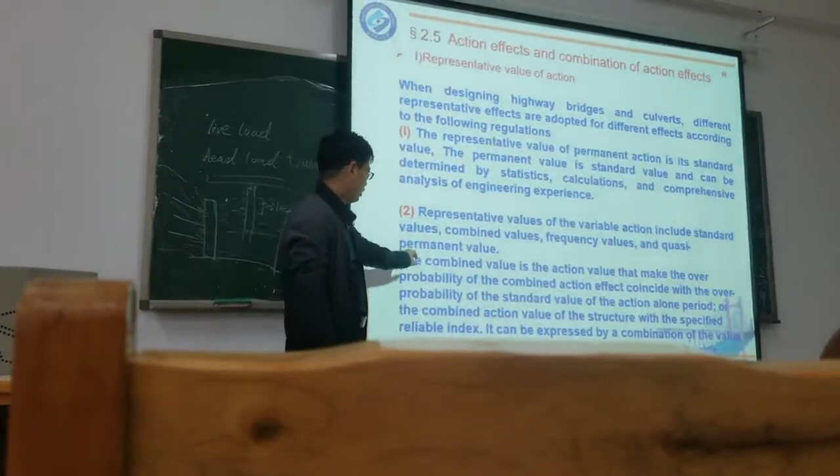The second type is the variable action. The reference value and the representative value can also be obtained by the standard value multiplied by different coefficients, and this coefficient is absolutely smaller than 1 - maybe 0.9 or something like this, considering different situations with different values.

This combined value is making the over-probability of the combined action effect coincide with the over-probability of the standard value. So that means with this action maybe acting on the structure alone, we can get the probability of this action.

For example, take the vehicle - if this bridge is just open for vehicles, with no people working there or anything else, just vehicles, this is a very simple situation, just the vehicle goes through this bridge. But if besides the vehicle we also allow people or animals to go onto this bridge, then we need to consider this as a second variable load or variable action.

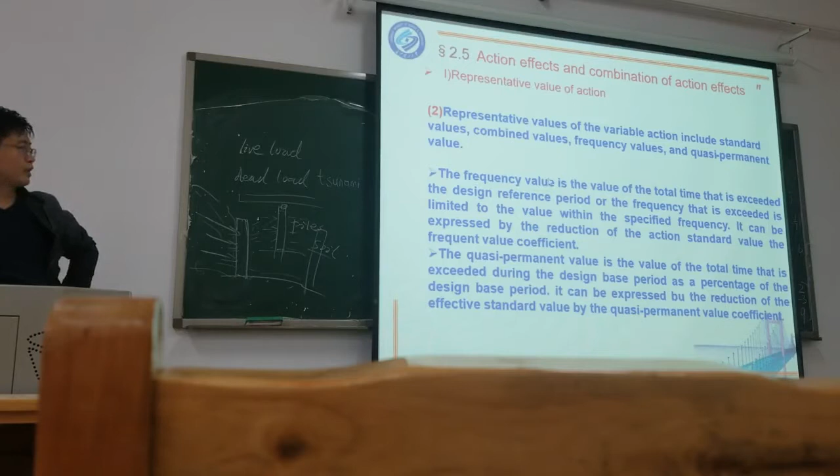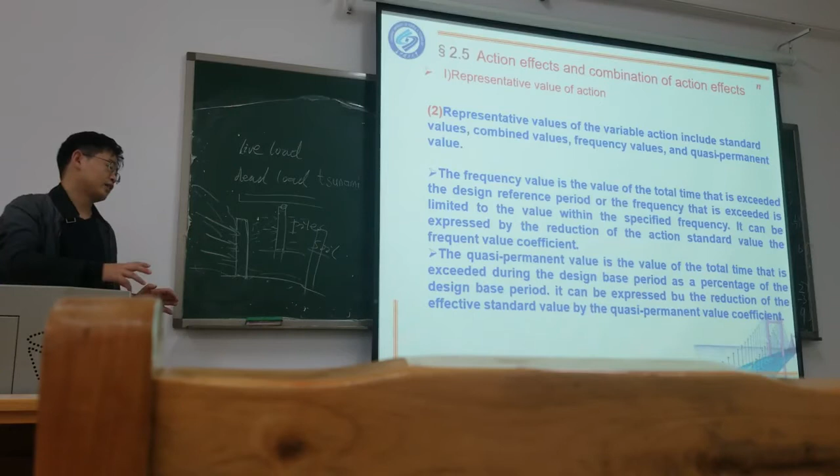So for this frequency value, let's see - when we design, for example, for vehicles, there's lots of different types of vehicle: large, small, heavy, light, lots of different cars. So when we design, the code just gives you a standard car, the weight, the dimension of the car, because you cannot consider every different kind of car. We just make it simple - we use one kind of car to represent all cars.

But this standard car, of course, is not the real situation. If you only use this standard value, you cannot reflect the real situation, because in real life different cars will make up the traffic - trucks, buses, small cars, and so on. At different times, different cars act on the bridge.

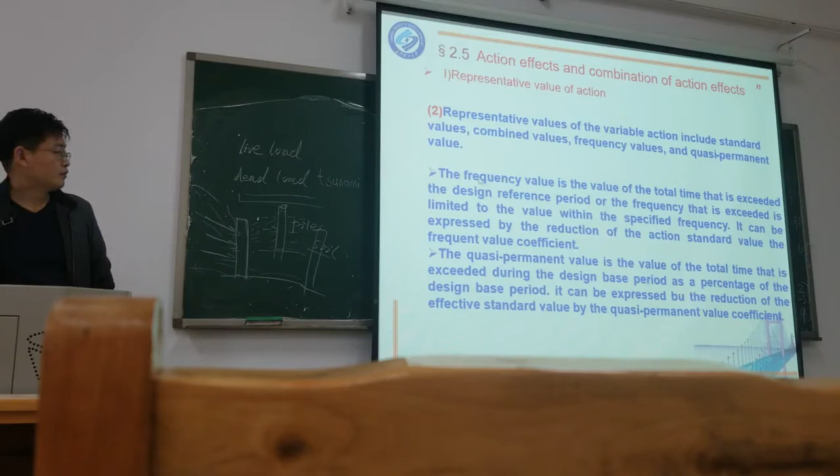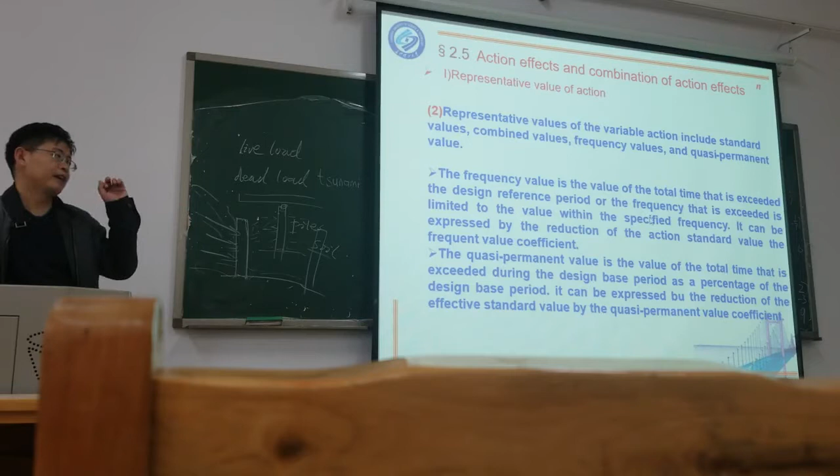So this frequency value is just used to consider, most of the time, the mean effect induced by the vehicle. This value can reflect that - because not every time is the car full on the bridge, or sometimes there's no car on it. Sometimes it's just one car, sometimes maybe 10 or even many cars. So you need to think.

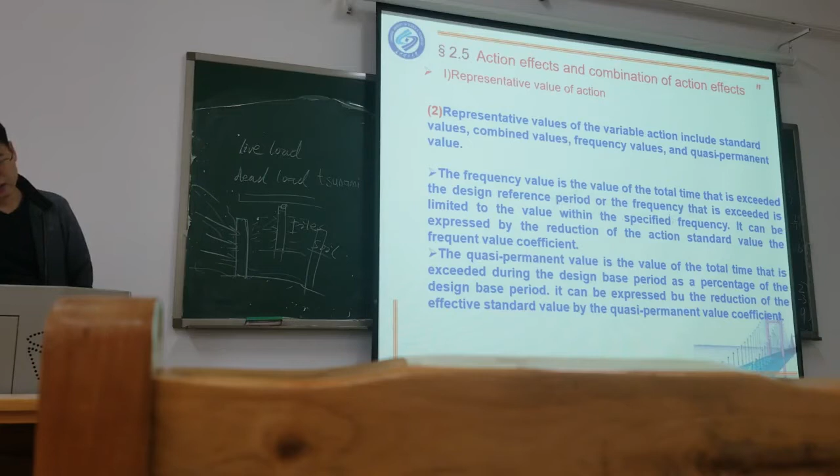It's a statistical probability question. There's no fixed value. So that value is just to consider the mean situation, the mean probability. Or as this sentence says: it is the value of the total time that they exceed the design reference period, or the frequency that they exceed is limited to the value within the specified frequency.

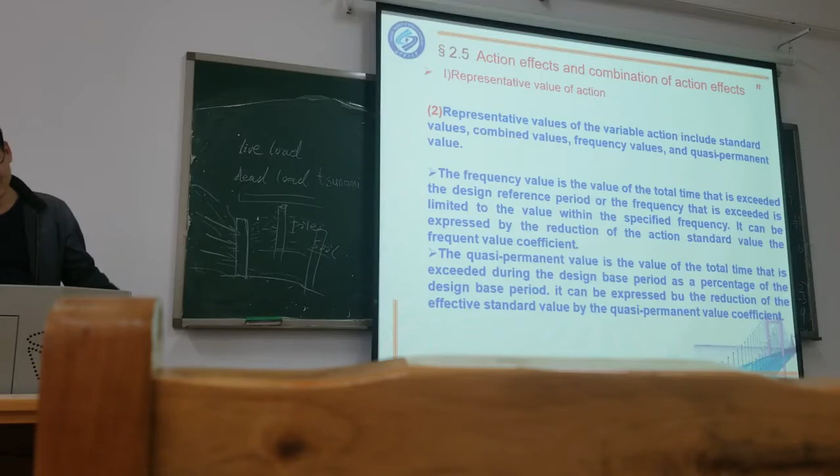Maybe this translation is poor. It's not clear, it's confusing. Yeah, it's confusing, yes. In China, I'm not sure - your Chinese, maybe in Chinese it's a little bit clearer. Chinese is well...

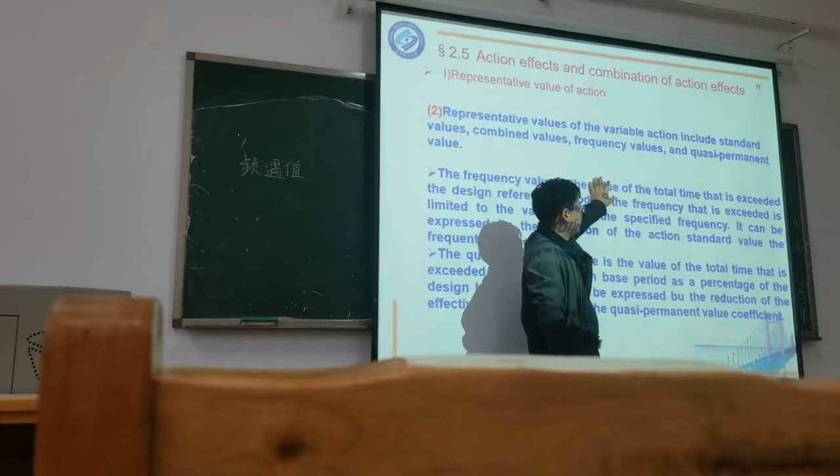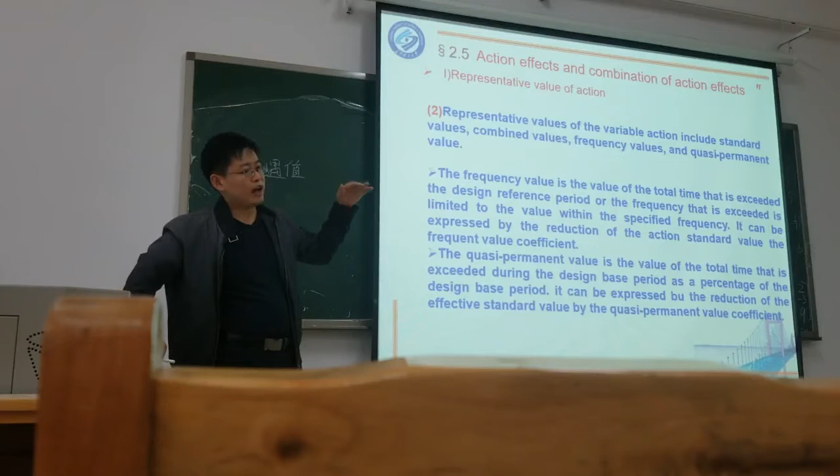To me, yeah, this sentence is confusing. This frequency value is the value relatively large - that means during the design period, maybe 100 years, this value happens very rarely. Or we see the value larger than this frequency value - maybe only has a 5% probability, or something, or 1% probability. So during the design period of the structure, this frequency value is exceeded, or the value appears larger than this value.

The situation is very rare, it's limited.

Suppose the standard value we see the vehicle load is maybe 100 tons, just an example. And this frequency value may be 98 tons. Because this value is just a standard value, we don't use this value in design. This value is based on the statistic method or calculation method. On the bridge, different cars, buses, small cars - it's very hard to define what's the value of this car.

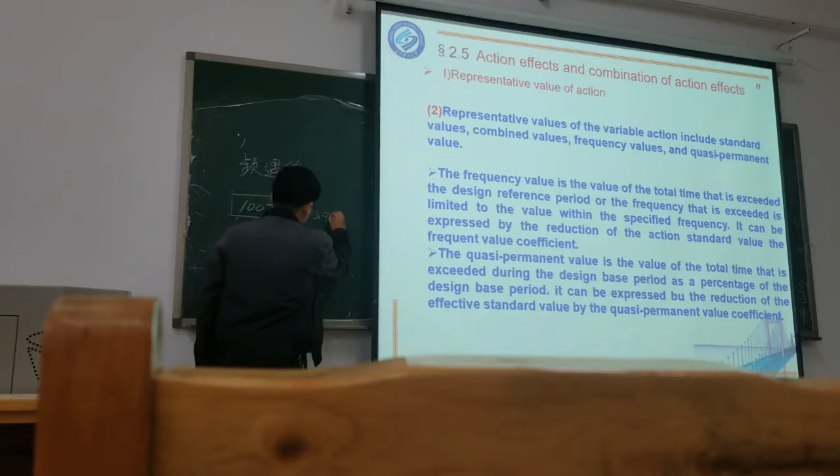So we make a standard value, and when we design, we consider different destinations and use different values, multiplying by some coefficients to get the relative frequency value, the combined value, and different values. So for this frequency value, maybe the coefficient is 0.98, and we got 98 tons.

For this region, during this design period of the bridge, or during this 100 years, the load larger than or exceeding 98 tons - this situation is very rare. Maybe the probability of the situation larger than this value is only 5% or something like this. So because there's no fixed value, what's the probability?

In Chinese the explanation just says it is limited - the situation is limited, very rare. That's the meaning of this frequency value. The frequency is actually very limited, very small, very rare. It's very hard to meet the situation where the load will be larger than this. So that's the meaning of this frequency value.

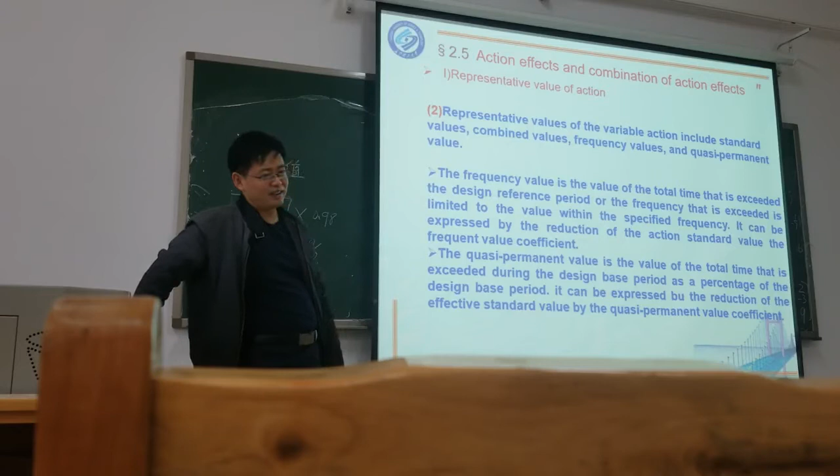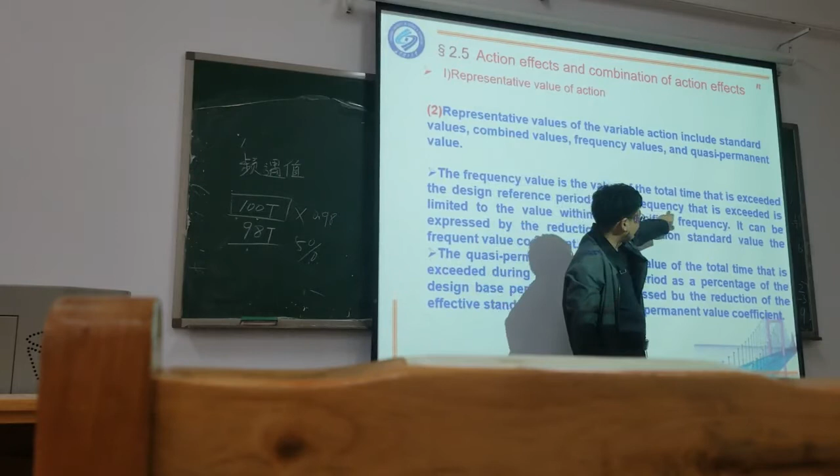So the frequency value is the value exceeded over time. Actually, it should be put there - the value is the value that exceeds the design. The frequency that is exceeded is limited to the value within the specified frequency.

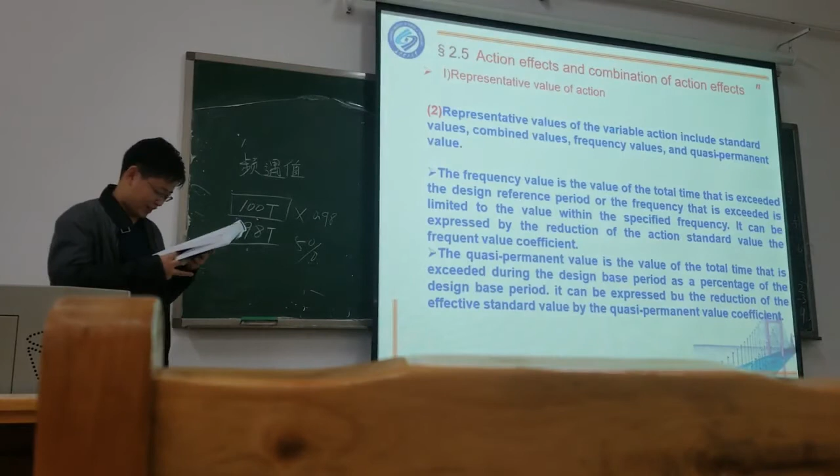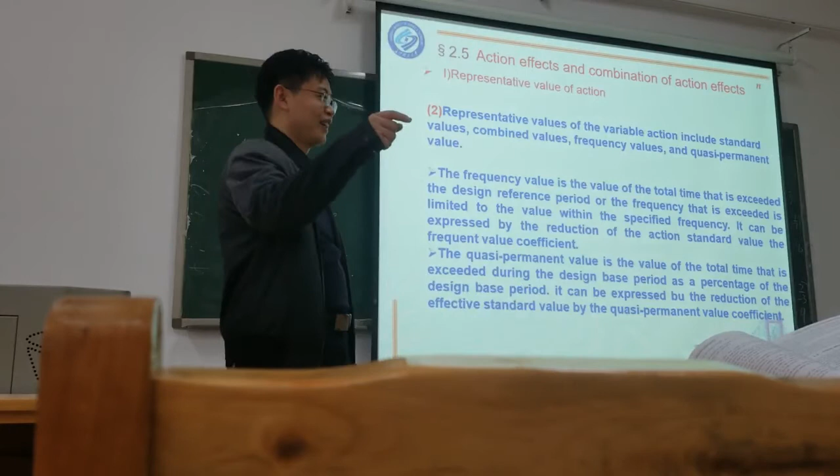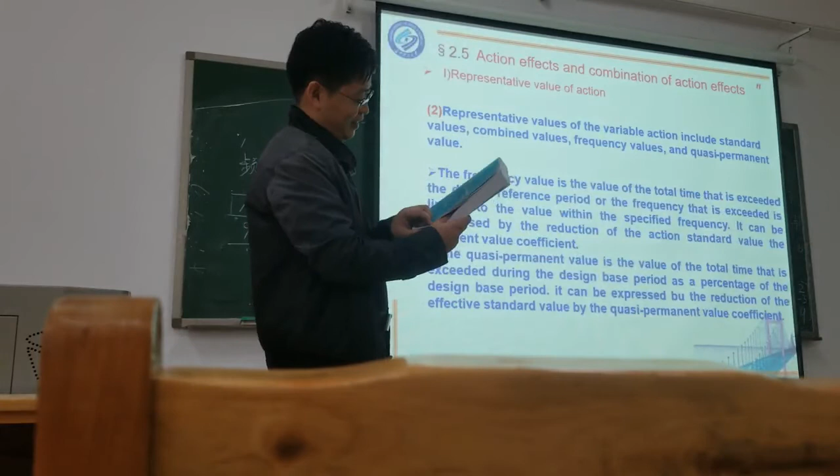When we get a book and read it, maybe we don't understand. This book's explanation is not very clear - I just copied the sentence from the book. The translation of the book is not good. I'll actually research and read more. Sometimes the meaning in Chinese words, when translated to English, isn't so correct.

So this is the frequency value, and the third value is the quasi-permanent value. This value is the total time that exceeds during the design period, as a percentage of the design base period. That can be represented by the reduction. This value compared to the frequency value is relatively smaller - during the 100 years design period.

Most of the time, this value is where the load is larger than this value. That's the quasi-permanent value - meaning this value is smaller than the mean value, most of the time.

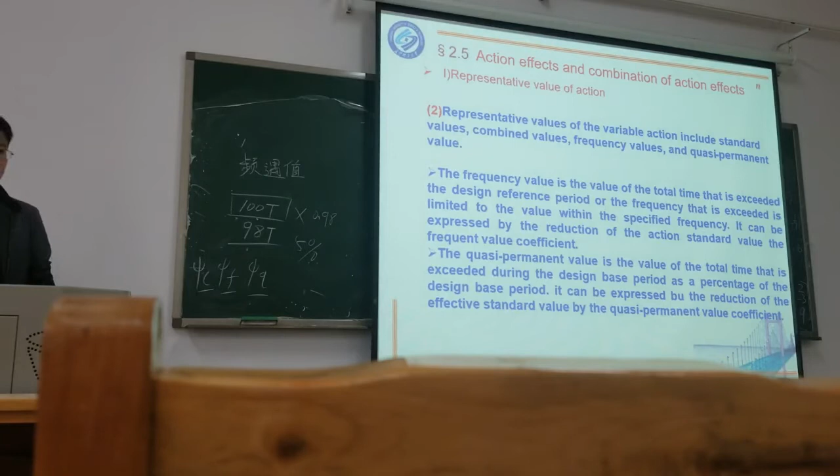For this coefficient, we got this right there. For the quasi-permanent, we got this coefficient psi q. For the frequency, we got psi f. And for the combination, we got psi c. Given the coefficient, multiply by the standard value, we got the corresponding value psi c, f, q - using the first word for frequency, the quasi-standard, and the combination value.

So that's the different values of the variable action. The basic thing is the standard value, and from the standard value multiplied by the combination coefficient, or the frequency coefficient, or the quasi-permanent coefficient, we got these different values.

So this is the second value of the variable action, and the third is the accidental action, singular effect. Take design value as its representative value, which can be determined by historical record, observation, and test combined with comprehensive analysis. Because an earthquake is different every time, how do we calculate or determine its value? It's determined by the historic record.

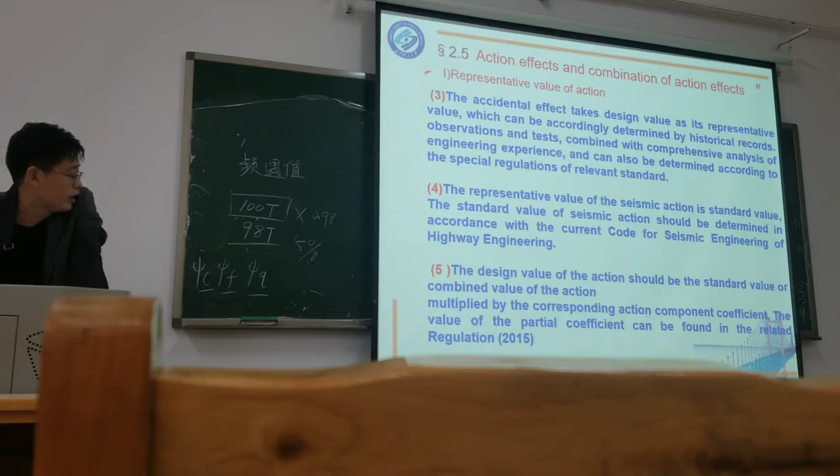So what's the meaning of this sentence? Design value should be the standard value or the combination value of the action multiplied by the corresponding action component coefficient. So here, because another coefficient is a component coefficient.

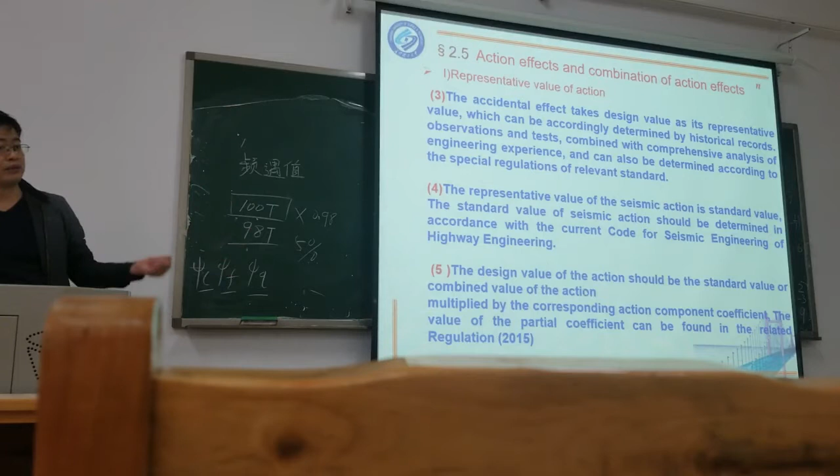So the representative value of the action, when designing the highway bridge and the culvert, should take into account the effect that may occur at the same time on the structure. The combination of the load capacity limit state and serviceability limit state should be designed according to the following principle. So here we see during the design, you need to consider the load carrying capacity limit state, and also the serviceability limit state, the two limit states.

So do you remember what's the difference of these two different limit states? They're both limit states, but what's the difference? Load capacity limit state and service limit state, what's the difference?

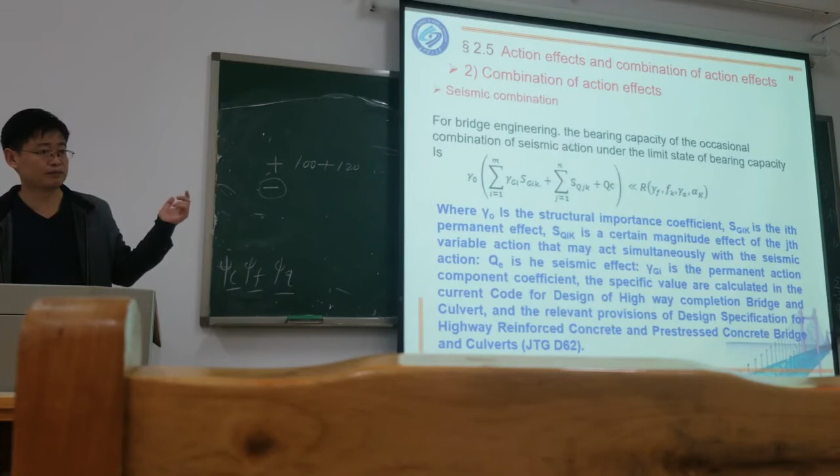Because for the combination, we have a basic combination, and also an accidental combination and a seismic combination - these three different combinations. So for this equation, we should use it for this permanent design condition and the short-term design condition. We should use the basic combination. The accidental design should adopt the accidental combination, and the seismic combination should apply to the seismic design.

So let's answer the main point of this sentence - limit state action effect. The first one is basic combination. For the limit state of the bearing capacity, the code stipulates that the basic combination is like this. So when we're talking about this, do you still remember what the permanent design condition is? Permanent design condition and short-term design condition - any idea? I remember I told you this last class. Try to find it.

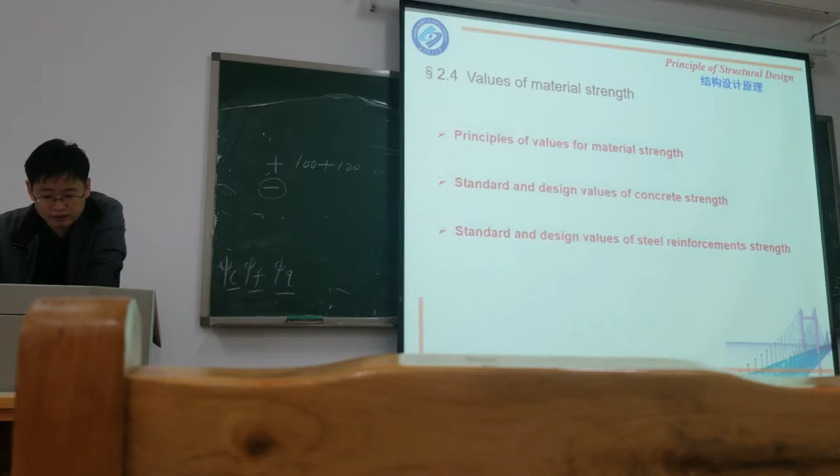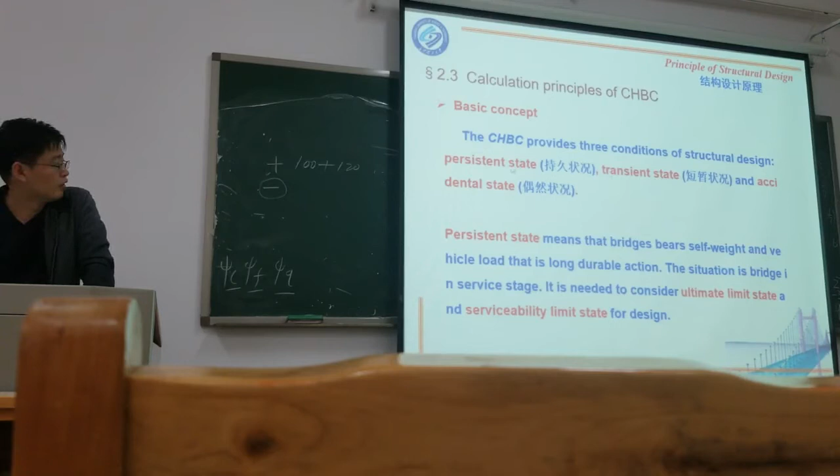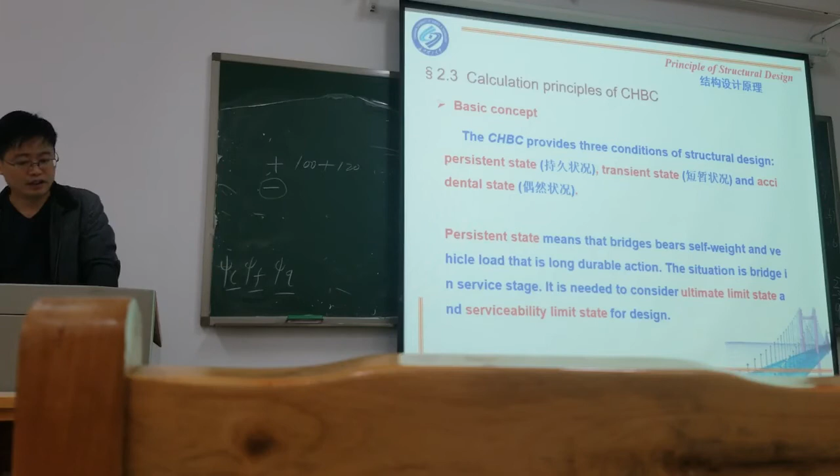I think it's related to persistent state, transient state and accidental state. For the persistent state and transient state - the permanent condition and the short-term condition. This transient state is just for the construction state, which is short-term compared with the service life. So the persistent state is actually the permanent condition.

So for these two conditions, permanent design condition and short-term design condition, we use the basic combination. For the limit state of capacity, the bridge code uses this formula.

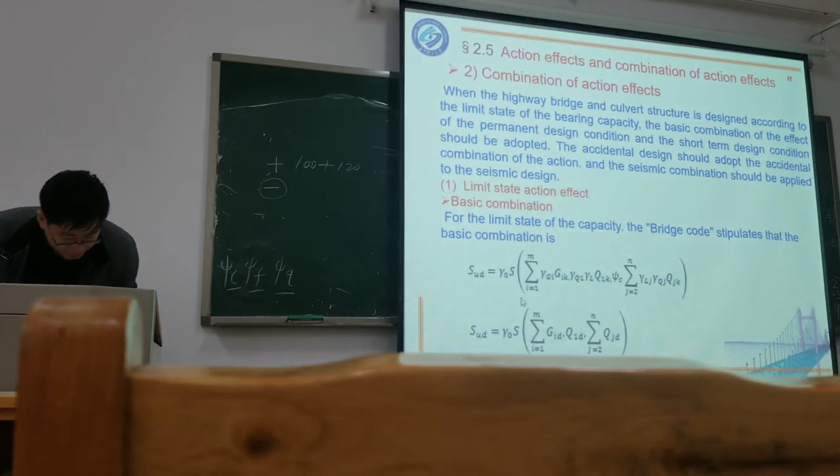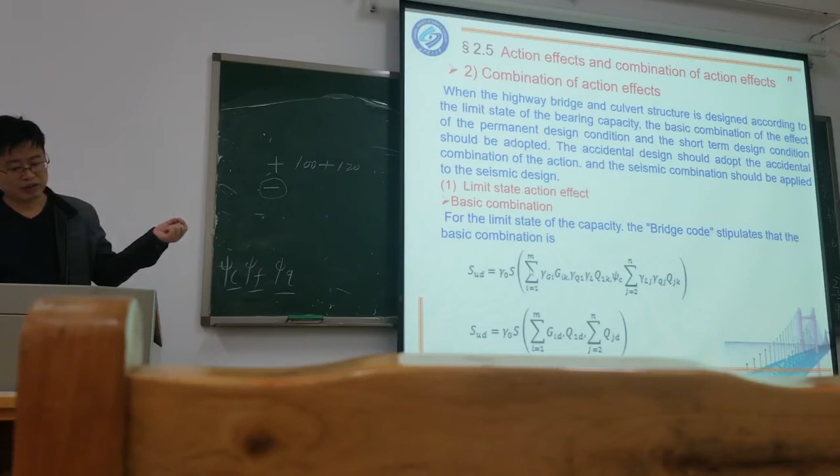In this formula, S is the effect of the load, including the dead load and the variable load. It's the result of the combination - this is the exact value used to do the combination.

Gamma 0 - do you remember what's the meaning of gamma 0? No. It's the importance factor of the structure. So if it's very important, we use 1.1. If important, we use 1.0. Just normal, not important, not serious - we use 0.9.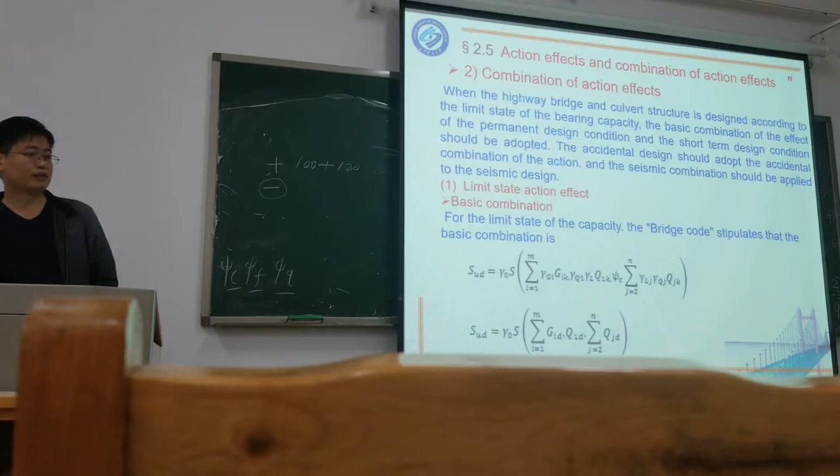So the most important thing is those things in the bracket: sigma, i equal to 1 to m, and gamma G, I, K. What does this mean?

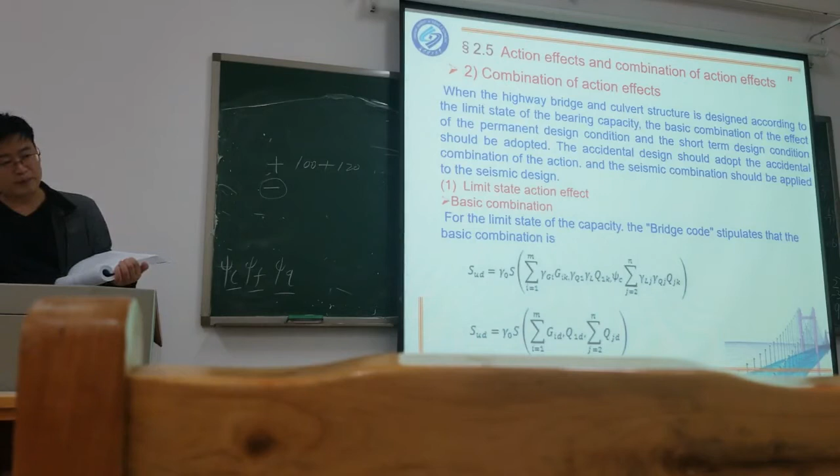What do you think gamma G means - this capital letter G? Actually, this gamma G, I is the component coefficient, or partial coefficient. Here they use the word partial coefficient, but before this they used component coefficient - same meaning.

So gamma G, the meaning is partial coefficient of the i-th permanent effect. Gamma G, I, K means the i-th permanent effect, with the component effect - action effect normally referring to the structural gravity or the pre-stress.

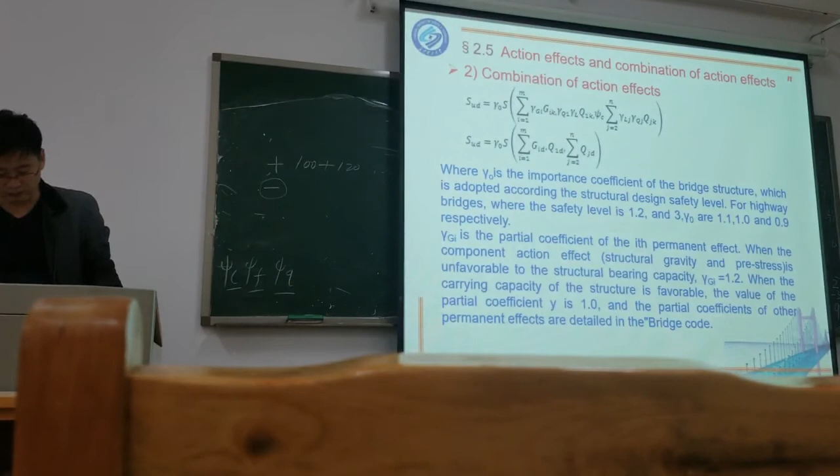And Q here is the partial coefficient of the vehicle load, including automobile impact force and centrifugal force - different forces induced by the vehicle. So for the vehicle, not only the self weight of the vehicle, but also...

...the friction force, or here we say the impact force. Actually, this impact force is in the vertical direction; friction force is horizontal. Where does the impact force come from?

Because the surface of the road is not so smooth - it has some up and down variation, and the wheel of the car is also not so smooth. So when the vehicle goes through the bridge surface, it will vibrate. This vibration will amplify the self weight. So this impact force is actually the amplified self weight of the vehicle. We normally use an impact factor to increase the self weight of the vehicle.